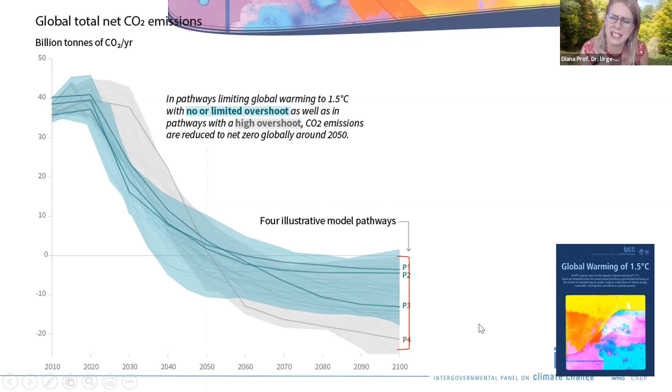The problem is there's a major concern in the scientific literature recently, because so many of these scenarios rely so heavily on BECCS. BECCS has issues with biodiversity and ecological concerns, but also with costs and many other issues. But if nothing else, just look at the intergenerational justice issue. Basically this means we continue to have fun while we delegate all these costs to our children, because BECCS has nothing else but costs - it's going to be very costly to capture carbon dioxide from the atmosphere and store it permanently, without offering much else.

As opposed to that, scientists were asking, okay, can we do something else, not relying so much on BECCS? Yes, there are alternatives, but not many scenarios out there meet the stringent climate conditions without this enormous amount of BECCS. What you see is the big difference between the two is basically a free fall in energy demand, not only emissions but energy demand. This means we cannot meet stringent climate goals without controversial technologies, unless with very strict and high attention to efficiency and energy demand decrease.

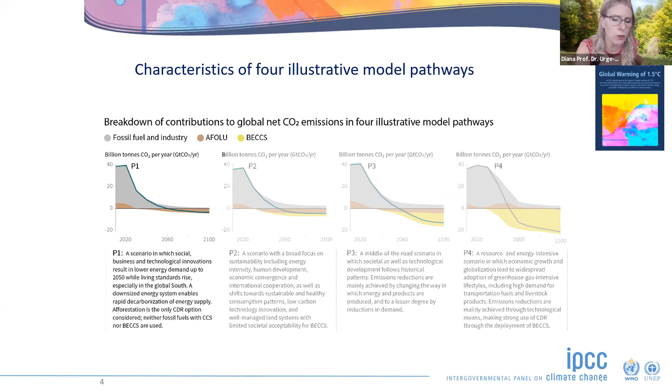This map—and you know that very well, so I don't want to take your time—shows there are many net zero buildings also in Europe. As you see, actually most are in Europe. But if you look around the scientific and professional literature, we could collect a very large number of buildings from around the world.

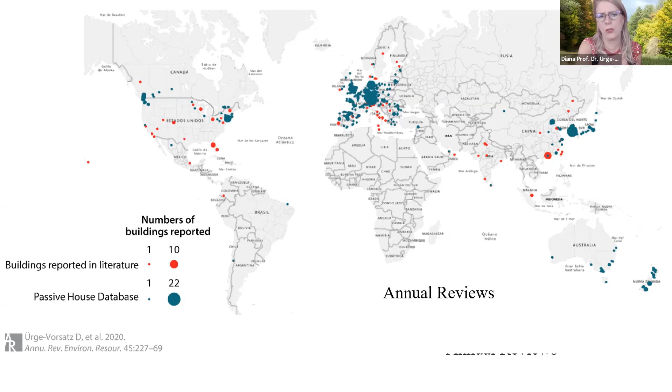But in all the rest of the world, although unfortunately there are not many examples yet in Africa, based on similar climates and experiences elsewhere, it's possible and feasible. But what we also concluded is that it's actually cost effective.

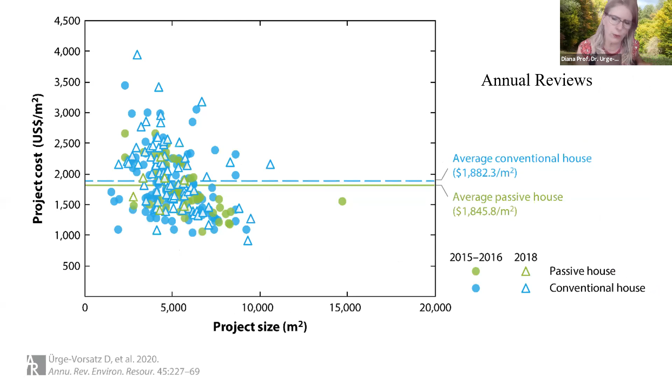Unfortunately, it's not very easy to find scientifically valid evidence for this, but for example, this is the figure we used in the paper. These are the costs for conventional houses in the same area—an area of Philadelphia—in the same time period, and the researchers found that the passive houses were in fact cheaper than the average conventional house.

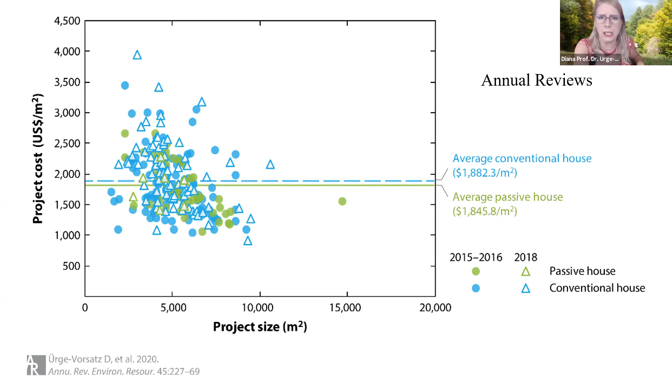Of course, there is a huge spread of costs all over the place, but the point is that on average you cannot distinguish. So for newly built buildings, you can definitely stay in the cost range of new conventional buildings, and where there were studies, we found the same.

In terms of retrofits, this is originally from our paper, but also from the IPCC report, the fifth assessment report. These are the retrofits—so the cost of conserved energy from retrofits, CCE per kilowatt hour saved—shown as a function of energy percentage saved compared to the baseline.

We also see that based on different types of climates and building types, there are very different costs. The point is that you can always make everything very expensive, especially in construction. If you do major retrofits, often you don't only retrofit energetically, but also upgrade the facade, make things nicer, put in new tiles and stuff like that.

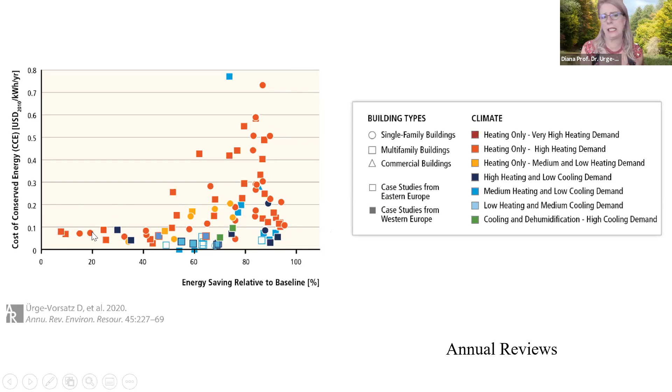So you can make it expensive, but the point is that the lower end of this curve is constant. You can have competitive cost of conserved energy for an 80–90% energy saving retrofit, as well as a 10% energy saving retrofit. And as I mentioned, this is kind of the power plant of the 21st century.

This is the building of the TU Vienna. And this building is also producing more energy than it's consuming.

I have to admit that here I made one of my biggest scientific mistakes, because originally I was trying to study which world regions and which building types you can do net zero energy buildings, and which you can't. This was also helped by Ksenia Petrichenko's dissertation, which she presented at eceee. We concluded that this building type is where it's impossible, in places where there's not a lot of solar energy—we are talking about high-rise and commercial buildings.

Now fortunately, if you look at the numbers, I wasn't that stupid to say that, because for this particular example, before renovation it consumed 800 kilowatt hours per square meter per year. A typical new office building in Vienna is about 450 kilowatt hours per year. However well you look, you cannot produce more than about 60 kilowatt hours of photovoltaic energy per square meter per year. So there is quite a big mismatch there. So perhaps I wasn't that stupid to say this is not possible.

But fortunately, there are more stupid people than I am who just go for the crazy, and this is what they have done. This is the typical new office building and its energy consumption—it's in German, but the details don't matter. Really, the point is that it's all the different types of electricity used in the building. And this is what they did.

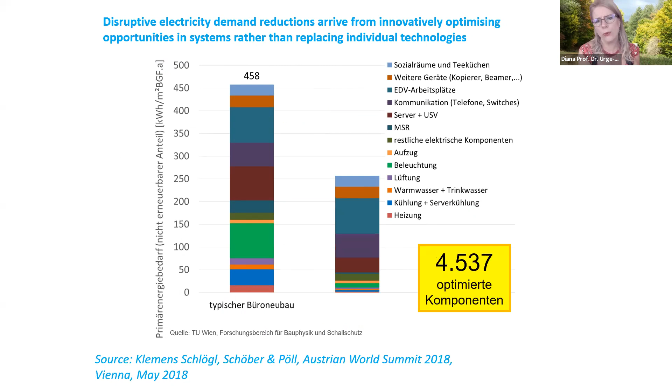What they did is they optimized 9,300 components, and as a result they reduced the building energy demand by nine-tenths—down to one-tenth of the original power demand. Most of our studies never really dare to say that you can reduce commercial building plug loads by 90%, but this didn't only study that, they implemented it. This is what happened.

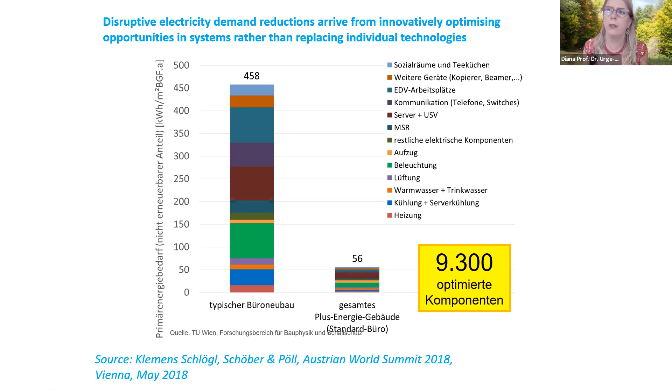We are doing the same now for CEU's new building complex in Vienna—trying to reduce the energy demand by that much, nine-tenths. But this means there is no silver bullet; you really have to have a very detailed understanding of the energy use of the people, the buildings, the components, the technologies, and only then are you able to achieve this major reduction.

So the key point in the paper that we illustrated with this example, but also provided other evidence for, is that the key to net zero energy buildings is actually energy efficiency—bringing down the energy demand of the building users. So not only heating and cooling, but all energy demand in the building. If you bring it down, then it is much more possible to do net zero energy buildings.

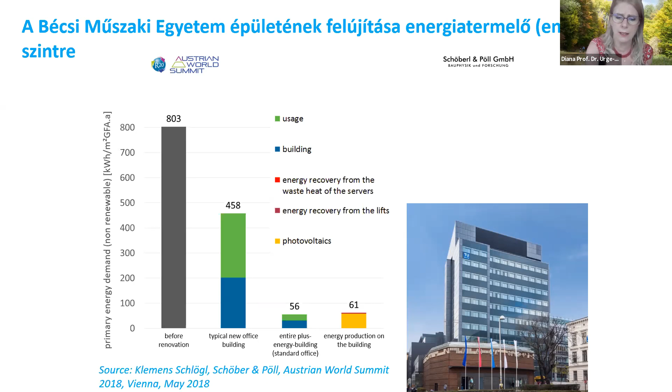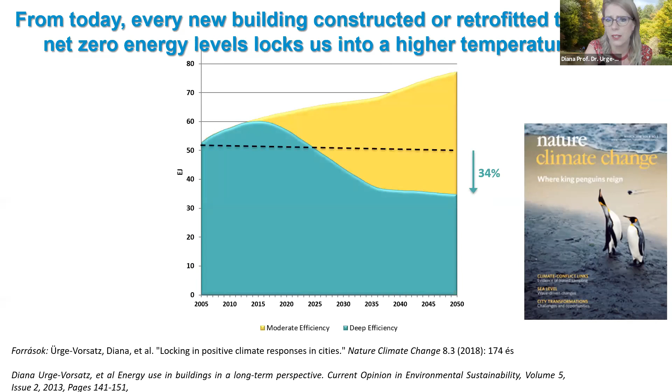As a final point, the problem is that we are not doing this. There is, for example, the renovation wave in Europe now—a lot of money under economic stimulus packages for different construction and infrastructure and building projects. But every single building we build from today, and every retrofit from today that goes to less than a net zero level, locks us into a higher temperature future. Why? This is a study we did and published in Nature Climate Change, among others—there are other references at the bottom of the slide.

Basically what we show is that if you compare a fairly ambitious building energy scenario globally—it doesn't increase as much as business as usual—to a more ambitious one, and this is not yet the most ambitious because this is our older research (we are updating these numbers now, and Souran presented our new numbers yesterday), even based on the much earlier technologies where we could not yet do such good net zero energy buildings, we are locking in 80% of 2005 total global building energy use by doing semi-good buildings. Because any time we reduce building energy consumption by just 20, 30, even 50%, you're locking in the remaining 30, 40, 50% that could be saved, because then it becomes too expensive to go back and fix it.

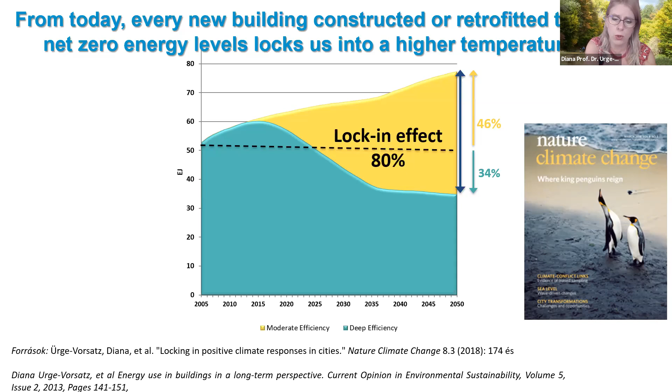But by 2040, 2050, we will need that reduction potential as well. Now we can still do it, we can still meet climate goals without them, because it's okay to reduce 30, 40%. But when we have to reduce 80, 90%, or 100%, we will need that potential, but it's going to be extremely expensive or impossible to go back for that. So really, it's crucial that from today, every new building we build, or every building we renovate, tends to be net zero. We have shown that this is all cost effective, and this is not rocket science, and it's available everywhere.

So let's not let a good crisis go to waste. Thank you for your attention.

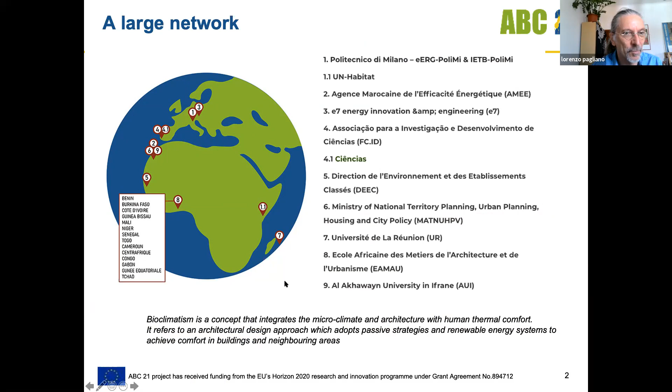So on energy, what we have found recently is that for high performance or zero energy buildings, recent research and standards tell us that the best way to qualify them is with 3 indicators, not just one. There is this net zero energy concept over a year, which has some problems. Diana already indicated a good way to solve these problems, but I will come back to that, and implications for policy, possibly, in our discussion.

So we try, throughout the project and this presentation, to use one language to be able to communicate effectively, and that's the language of the ISO 52000, where there is a common set of terms and definitions about energy performance of buildings, which can be seen also online, not only in the standard, not so easily accessible at this site. All the definitions are there in English and French. And we start with exactly what Diana was saying: reduce demand, and how can we define very well, physically, this demand.

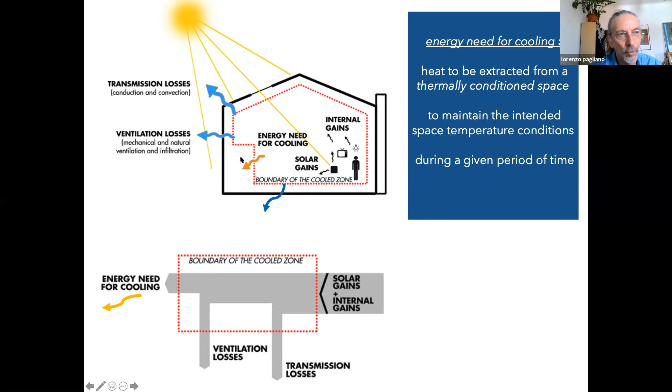The difference between these gains and losses is the remaining energy need for cooling - the energy that we have to extract actively, or with some passive device, but anyway with systems that will extract this energy to keep the temperature or conditions stable.

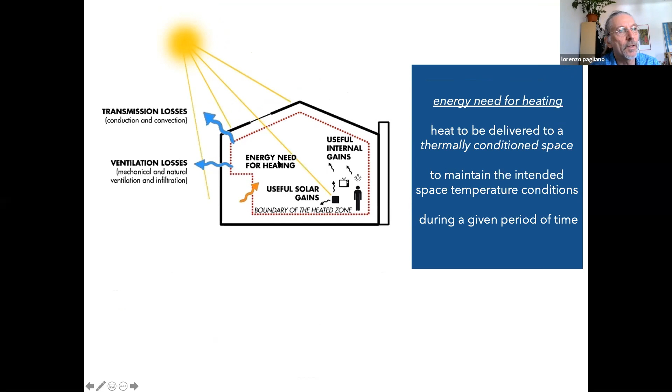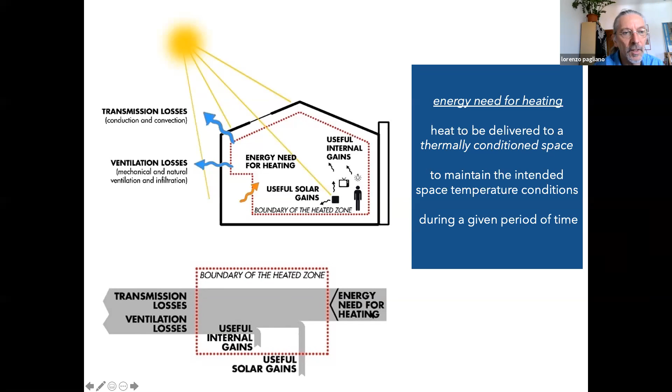And this red boundary here is the air within the room. Then we have the systems delivering this energy need, maybe a boiler, a storage, a radiator, a solar panel bringing energy there, gas bringing energy to the boiler.

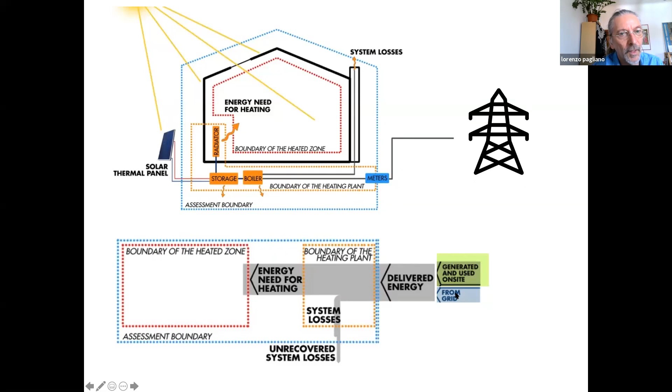So to obtain this energy need for heating, we use what is called delivered energy, which goes to the meter. It can be energy coming from renewable energy at the site or from the grid. The total entering the building, the systems of the building, is called delivered energy.

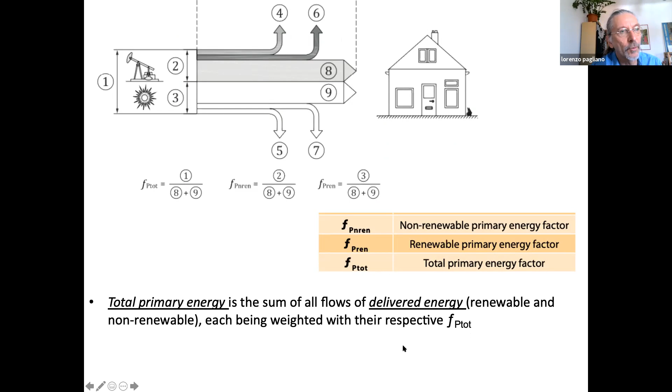And then we finally have primary energy, where we multiply the delivered energy - part fossil and part renewable - by factors that take into account the losses from the source to the boundary of the building. So we get total primary energy if we consider the sum of all delivered energy, renewable and non-renewable flows, and multiply each of them by their respective factor, which takes account of the losses.

If we then consider the non-renewable part of these flows, and multiply that taking into account the losses, then we have what is called non-renewable primary energy.

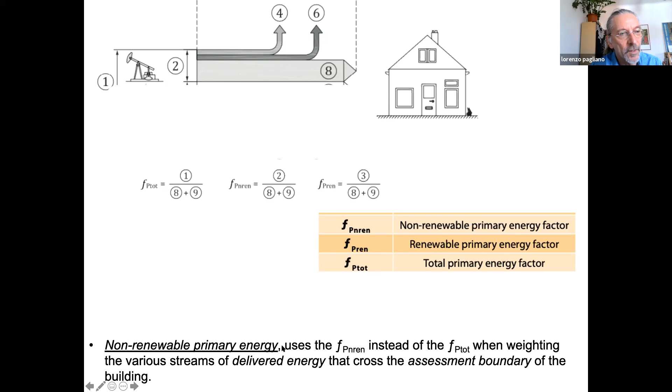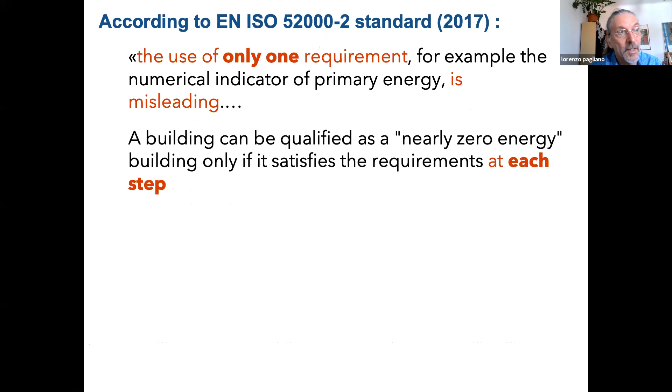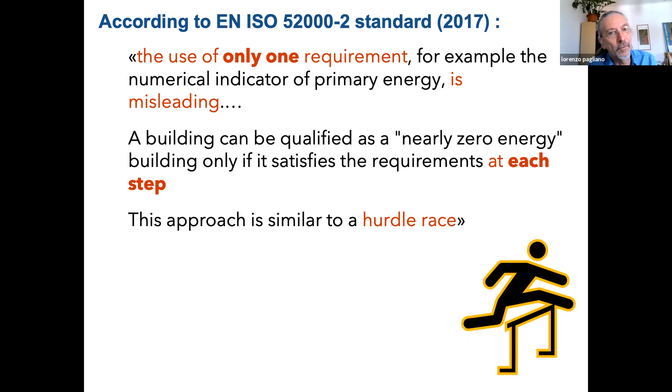So we have these indicators, and sometimes buildings are qualified using only one indicator, but that's a very incomplete way. The standard says using only one requirement is misleading, not only insufficient. We need to have three indicators and fulfill each of them. It's a sort of hurdle race where we have to overcome three obstacles.

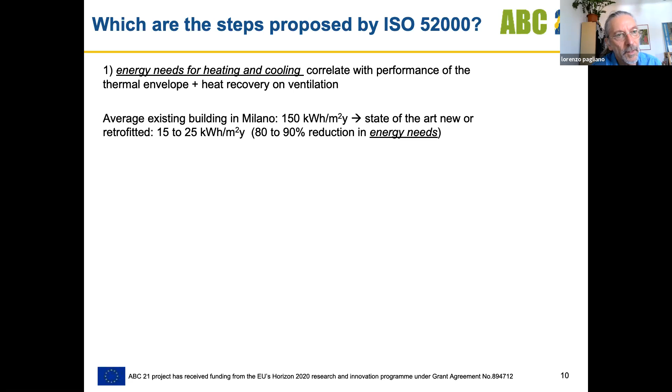These are the energy need for heating and cooling, which describes the thermal envelope and the heat recovery on ventilation. And as Diana was showing, this can be highly reduced - this demand for energy can be reduced by 80-90%, for example the use for heating and cooling in new buildings and in retrofitted buildings. That's the first hurdle we overcome.

And the biggest one, the one where we can make a difference: total primary energy describes how the active systems use fossil or renewables efficiently or inefficiently. This is a low total primary energy, a second step to achieve.

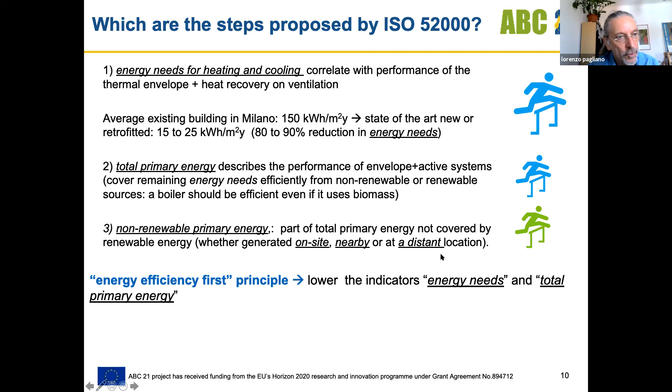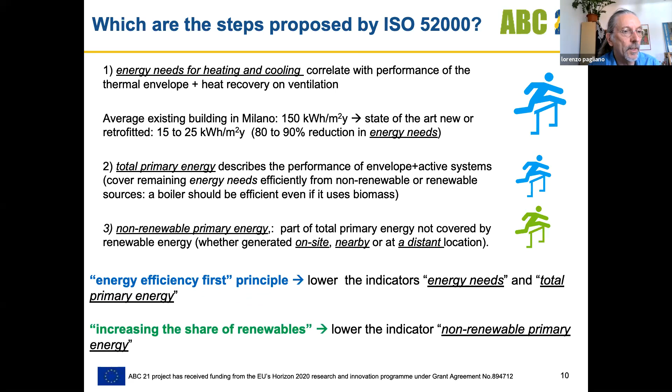And then a low non-renewable primary energy - so a low part of primary energy coming from fossils is the third thing to do. So we can say the energy efficiency first principle is telling us to make as low as possible the energy needs, first of all, and the total primary energy. And the objective of increasing the share of renewables is achieved if we can reduce the indicator non-renewable energy.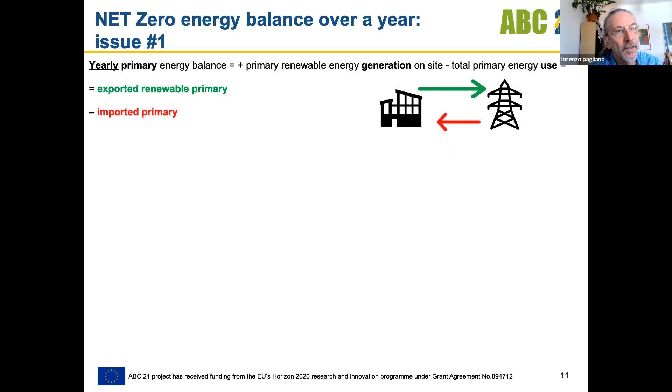Sometimes these objectives are expressed through this net zero energy balance over a year, which can be described as exported renewable primary minus imported primary to the building. So we could say, okay, over a year, we have as much imported from the grid as we export of renewables to the grid. These two things balance out, and we have a zero energy use.

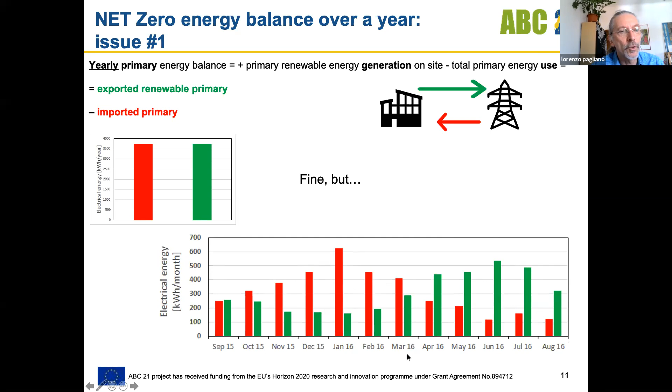And this, for example, is what we have over a year, which is a good goal. But if we then look hour by hour, or in this case month by month, we see that if energy is generated by photovoltaic in Milano, we generate a lot of this green energy in summer and much less in winter, where we need more - so we have more use in winter than production and vice versa - which means that we still burn gas and emit CO2 in winter.

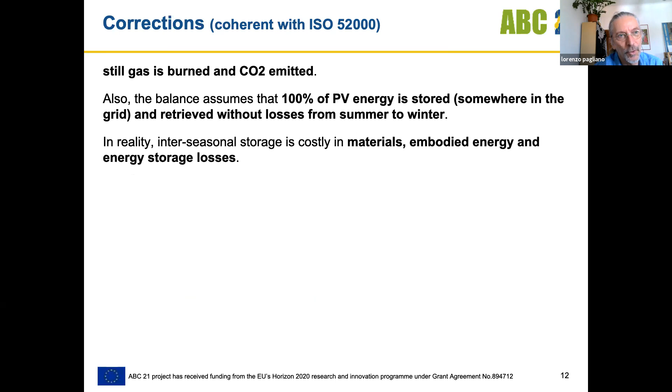And if we do this balance where we say, okay, but the total is zero, we are assuming that the photovoltaic which I export to the grid in summer will be available for me in winter for free, with no losses due to having been stored for 6 months. This is obviously physically not true. Interseasonal storage costs materials, embodied energy, and energy losses.

So we should try to reduce this problem by regulation. For example, the energy balance in Italy is calculated on a monthly basis, not on a yearly basis, so you can't offset your overconsumption of winter with the overproduction of summer. We could calculate the renewable primary energy factor, including the losses, while in the trivial way to do this balance, the losses are simply ignored. But obviously the right way to do it is the physical way.

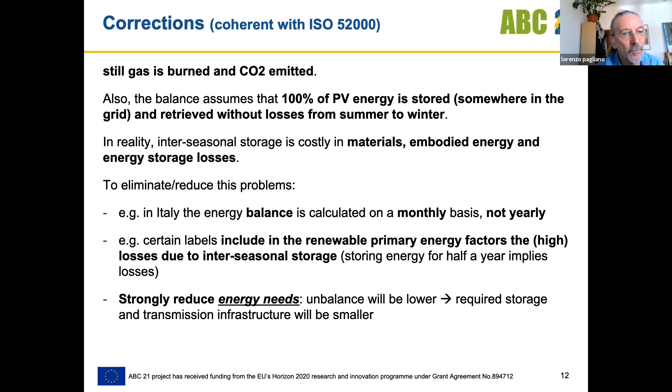If we reduce the energy needs, if we have a very low demand, also the imbalance between one hour and the next, and the imbalance between summer and winter, will be reduced by a factor of 10 - so reducing the requirements for storage and transmission infrastructure.

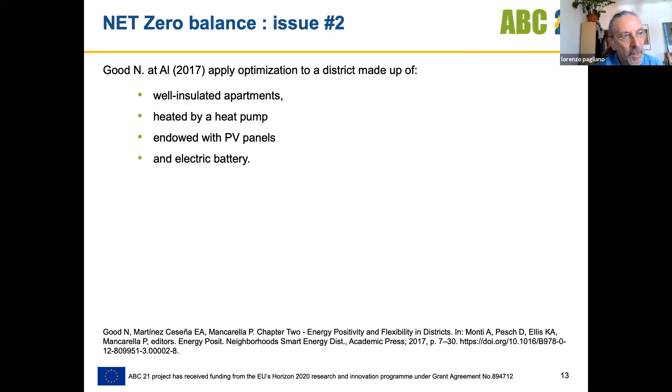There is another issue with this zero energy balance. Here it's a case of a village with well-insulated buildings, heat pumps, PV, and battery.

Optimizing it for net zero energy, the researchers find that, okay, the optimization doesn't use the battery at all, because using the battery means having losses of storage - you store, you recover, you don't recover 100%. So in terms of this balance, it's much better to sell to the grid, where the losses magically disappear in this accounting.

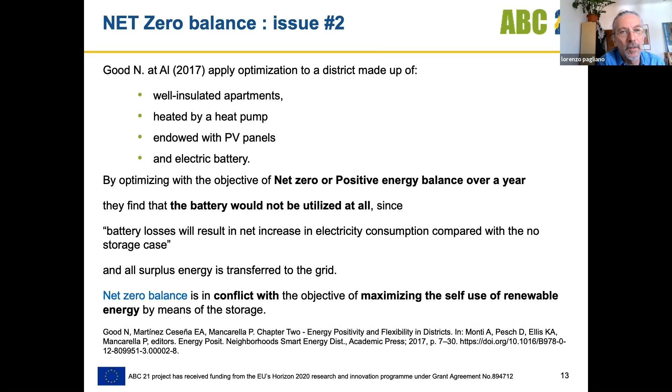So in this sense, net zero as an objective, a mathematical objective, is in conflict with maximizing the self-use of renewables using storage.

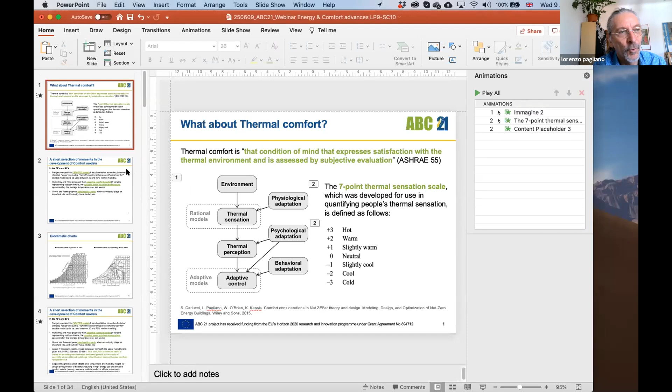So the second part of this chat was about comfort. What is thermal comfort? There is a general definition incorporated into standards for many years now, according to which thermal comfort is that condition of mind that expresses satisfaction with the thermal environment and is assessed by subjective evaluation. This is specifically the version of the ASHRAE 55. But what that means is, let's say, not a physically bounded definition. There are terms like satisfaction, like subjective evaluation - how can this really help the physical design of a net zero energy building?

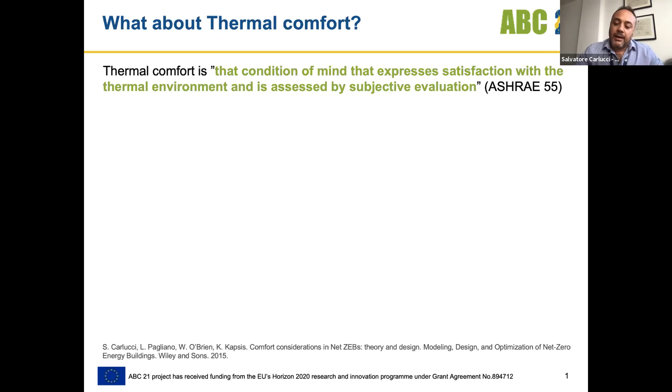There is a context in which the term thermal comfort fits. That is this kind of schematic where we consider the human body, each of us, exposed to some environmental condition, and what we perceive as a thermal sensation is basically the result of the reaction of our body. This is a physiological adaptation to the environmental condition. There are some models developed in the past 50 years that have tried to quantify this effect in order to predict and assess thermal conditions in buildings affecting the human body.

Then there is a second level, the thermal perception - how we perceive the thermal environment we are in. In this case, we have a second layer, a second lens to interpret the condition, due to our psychological reaction and adaptation to it. Then there is another level, which is actually the adaptive control that we exert in the building. It depends, of course, on the psychological adaptation we use, but also behavioral adaptation - what we are as social human beings - which might impact the way in which we interact with the building.

Thermal sensation, without going too much into the details, is quite interesting since it's something that is easy to understand and is directly used for some of the assessments we will see in a while. It is typically expressed on a 7-point thermal sensation scale. There are other ways to do it too, but basically it's a vote each of us can express to qualify the thermal environment we are in. It's represented using this discrete scale from +3 to -3, hot to cold. There are official translations in other languages, and the typical English reference goes from hot to cold, passing through warm, slightly warm, neutral, slightly cool, cool, and cold.

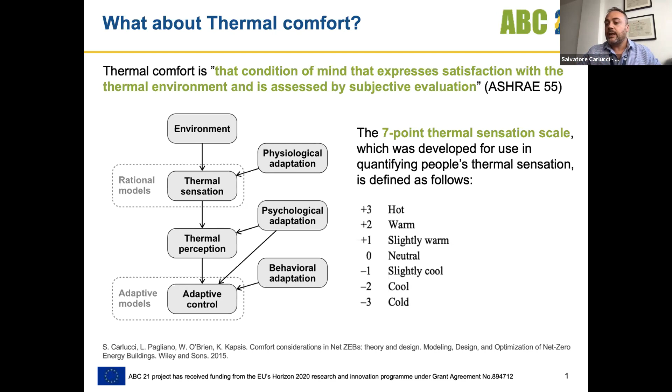This is the way we typically try to evaluate thermal sensation, and it's used by rational models - typically energy balance based models - that try to model the human body like a white box and account for each of the energy fluxes entering and leaving it.

Just a brief introduction about the evolution of thermal comfort. Everything started in the 60s, the models were framed in the 70s, and in the 80s there was a strengthening of the concept.

One of the most important and referenced models, particularly of this kind of rational, energy-balance-based approach, is the Fanger model, also called the PMV-PPD model, where PMV stands for Predicted Mean Vote and PPD for Predicted Percentage of Dissatisfied people. It's a model that takes 6 variables as input, but none of them is related to the outdoor climate - that was one of the first criticisms this model received. But this model was really accepted by the community and has been integrated into standards, and is still referred to until now.

It was very important to mention that Fanger in the 70s, in the book Thermal Comfort, mentioned that humidity has a low influence on thermal comfort. This is extremely important to keep in mind also for assessment that we will discuss later. When Fanger presented the model, he stated that it is reliable and can be used for considering some ranges for the input variables. Relative to relative humidity, these ranges go from 30 to 70, so outside this range, this model should not be applied.

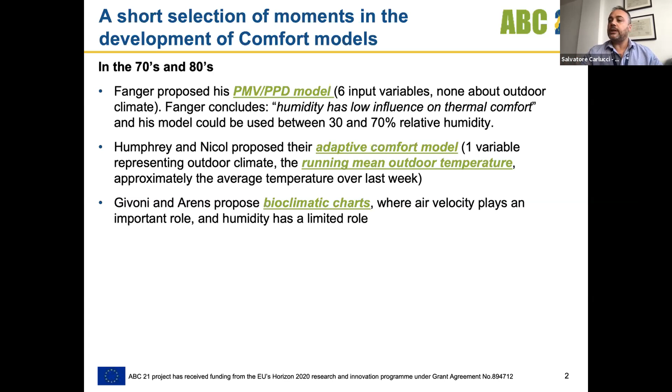There is a third approach that was very common in that period, in the 80s, proposed by Baruch Givoni and Ed Arens, that was also represented graphically through a bioclimatic chart, where it was very interesting to see that air velocity played a very important role, while humidity again was there but was not really changing the game.

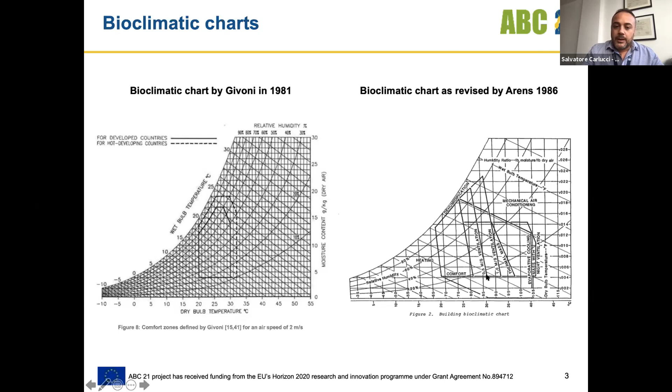It's also interesting to mention that Arens, in the 80s, mentioned that for natural cooling it was necessary to modify the upper humidity level given in the ASHRAE standard. This is in 1981, and this is a number that is quite common in our community: 12 grams of vapor per kilogram of dry air. The justification was that this value is based on avoiding condensation and mold growth in the ducts of centrally air-conditioned buildings, rather than on human thermal comfort requirements.

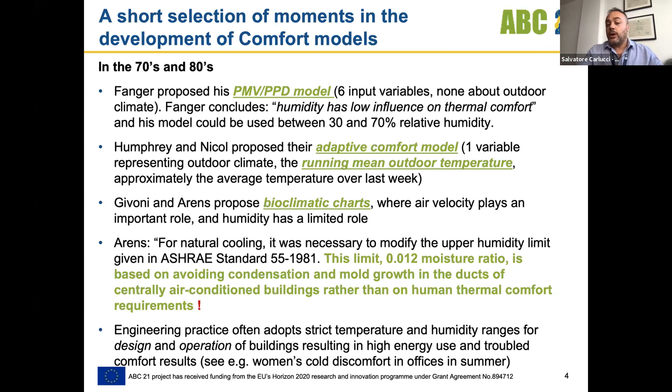So again, this kind of threshold was present in order to solve a very important technical issue, and was in some ways extrapolated and used as a sort of threshold for thermal comfort application. That is not the case. Then engineering practice in the last decades has in some ways incorporated, and this is very good, thermal comfort models, sometimes approximating or simplifying them in a way that actually is not really aligned and comparable with the original indications of the main researchers. So, for example, this is a picture from a standard.

What we can see here, without getting too much into the details, are the temperature ranges for the heating season and for the cooling season, where the typical conditions for energy calculations are presented with this range: for heating from 20 to 24, and for cooling from 23 to 26, giving the energy analyst the possibility to decide what kind of threshold to use.

So we could also get into the paradox of choosing 23 degrees as the set point for cooling, while the set point for heating might be 24. That is quite crazy, but actually Ed Arens, through an experimental campaign in California, demonstrated that on average these are the kind of figures that are identified. Why? Sometimes we, as practitioners, mess up between design, control, and assessment. These are completely different aspects that require different hypotheses and sometimes different assumptions. This is extremely important to keep in mind.

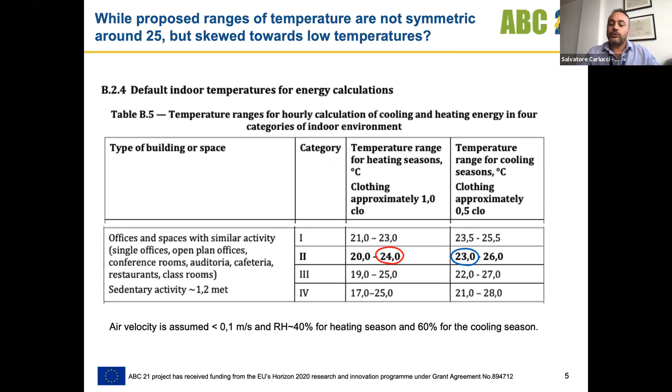Going closer to our time, we are at the 21st century. Fanger in 2002 acknowledged that his model might suffer low predictive skills in real buildings, basically due to the fact that this model was developed in climate chambers, in laboratory studies, in particular in warm climates.

He proposed corrective factors that could even expand the comfort range by a factor of 2. So you see how big the uncertainty applied here becomes.

Meanwhile, in recent years, thanks to efforts like the European SCATs project and the ASHRAE RP-884, which led to the creation of the first ASHRAE Global Thermal Comfort Database, adaptive models were introduced. They were first integrated into ASHRAE 55 in 2004, and then the European standard incorporated one in 2007. Recently, thanks to the contribution of the whole thermal comfort community and annexes like Annex 69, a new ASHRAE Global Thermal Comfort Database has been released, incorporating even more data than before, representing the largest data source available on thermal comfort in the world, covering different types of buildings, thermal zones, and conditions.

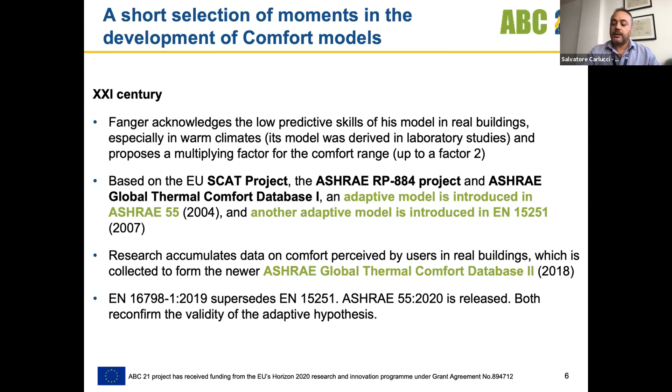What's interesting is that standards also evolved over time. The EN 15251, which first incorporated the European adaptive comfort model, has been superseded by EN 16798 Part 1, 2019. The ASHRAE 55 is also in an ongoing revision process, but both standards confirmed the validity of the adaptive hypothesis—it's still there and actually getting strengthened.

Just to give an overview: the first time thermal comfort got integrated as a concept into technical standards was in 1966 with ASHRAE 55, and the latest revision of this set of standards is from 2020. So that's about 50 years we've been discussing thermal comfort. Here in red you can see the evolution of ASHRAE 55. There was a first revision in '74, I mentioned this earlier, then '81, then '92. Since 2004, the adaptive comfort model has been integrated, and since then it's been in a continuous revision process—every 3 to 5 years this standard is updated with the latest advancements and evidence from research.

Here we also see the ISO standard, which right now incorporates just the Fanger comfort model. Its latest version is from 2005, revised but confirmed in 2015. Then there are the European efforts with EN 15251 from 2007, revised in 2019, where we have both the Fanger comfort model and the European adaptive model. So there's a lot of activity in this sense.

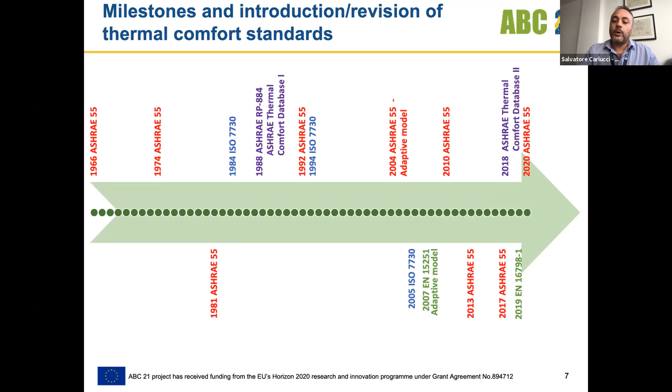Now, to summarize a few key points helpful for this discussion, we'll refer to the latest version, ASHRAE 55-2020, which has some very important elements of novelty in its latest revision.

Picking a few elements—there are even more novelties, but basically the first element is that the applicability of the adaptive comfort model has been extended also to buildings that have mechanical cooling systems installed, as long as they are not in operation. Before, the adaptive comfort model was limited just to naturally ventilated buildings, as they were called.

Also, what's interesting—the second point—is that operating set points for buildings are not mandated. There's no table that says 'this is the reference value' in this standard. So we're moving towards a point where, instead of specifying specific conditions, we can specify scenarios that the designer can meet, giving flexibility to adapt to site-specific or occupant-specific conditions.

An extremely important new element, the third point, is that air velocity has been formally integrated—both modifying the analytical model with the introduction of the elevated airspeed comfort zone method, based on PMV plus the standard effective temperature, applied when airspeed is higher than 0.2 meters per second, and also in some ways integrated into the adaptive comfort model. We'll see that shortly.

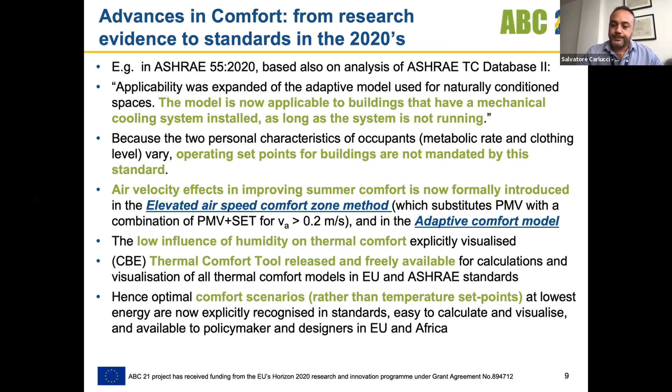So we no longer have the 21, 24 degree C scenario with fixed condition set points, but comfort scenarios instead—we set the conditions. This is just the analytical comfort zone method based on PMV/PPD, the Fanger comfort model, represented in normative appendix B.

We have compliance with the model if the PMV (predicted mean vote) falls within this range between minus and plus 0.5. This thermal comfort tool can model all of these models. What we have to keep in mind when applying this model is that the metabolic rate of occupants has to be between 1 and 2 MET, and the average airspeed has to be lower than 0.2.

This model will ask for some additional verification based on local thermal discomforts. What we see is that we have no upper and lower limits on relative humidity. This is a difference with respect even to the bioclimatic charts of Givoni and Arens that were 95% and 0.04. We also no longer have this reference to the 12 grams of water per kilo of dry air, so actually we move up to saturation.

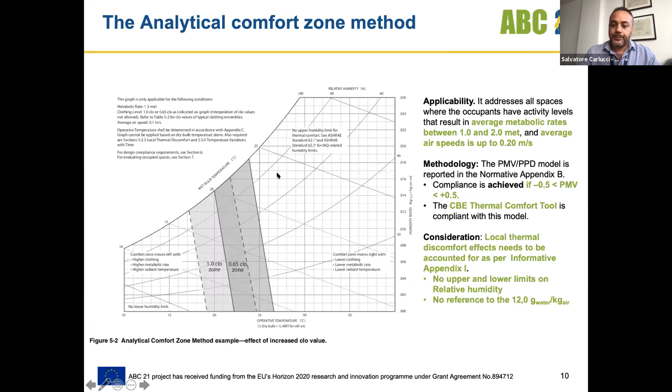The elevated air speed comfort zone method is an analytical tool based on coupling the PMV plus the SET, providing additional information on the thermal comfort zone for airspeed higher than 0.2. What's really interesting is that we could be in comfort for SET values that might reach temperatures in the range of 30-31 degrees with airspeed in the order of 1.2 meters per second. This is extremely important; it changes the way we deal with comfort in this case.

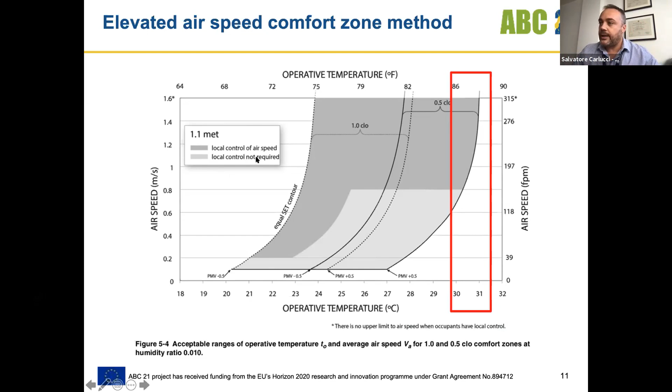We should also consider whether we have the capacity of controlling the airspeed. In order to achieve this condition, we need to provide users the possibility to directly control it. I'd like to challenge you to look at this and compare it with the previous table - it's very much different, the kind of condition that we can represent.

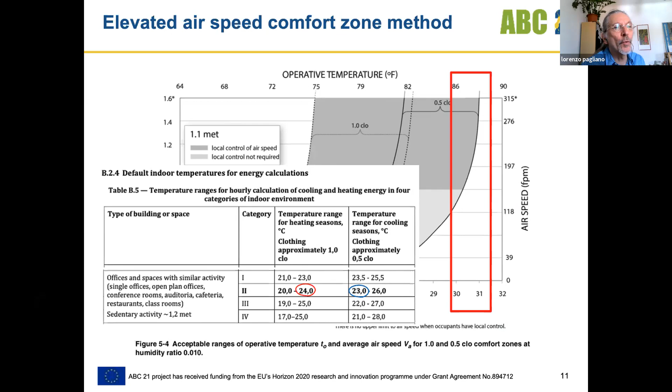Salvatore is telling me that we are till 4:15, so we need to leave some space for discussion. But okay, I'll go to conclusion. Thank you very much, very clear. In a few minutes.

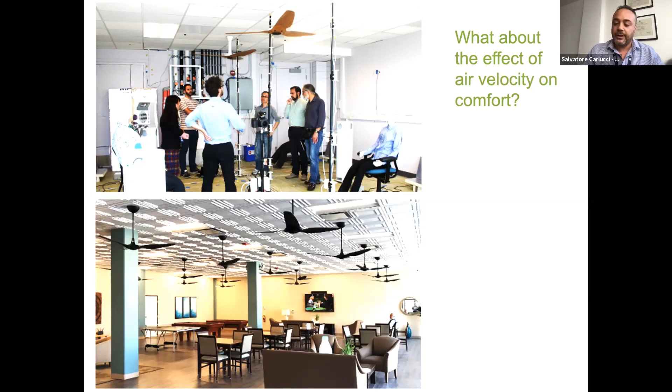What that means is that installing, for example, these kinds of ceiling fans can be very effective in increasing airspeed. There are tools, again, that can help us in designing these solutions.

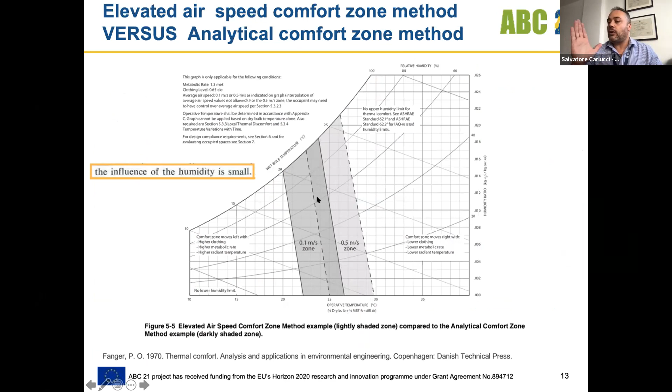The elevated airspeed - you see here what is the impact from moving from 0.1 meter per second to 0.5. That is not extreme airspeed. We have an increase, a shift of the comfort range by at least 3 degrees. Again, the influence of humidity is quite small - it's just the slope of this line that is presented here.

The adaptive model: here the input is the prevailing mean outdoor air temperature, then we get the optimal condition. What is really important is that now we could consider, under the scope of this standard, also buildings that have mechanical cooling and heating systems but they are not in operation under this specific model. But people have to be free to adapt their clothing, so no dress clothes or things like that.

Another important change is in the reference comfort conditions, which is now the 80% acceptability class, while the 90% that we bring from the past is now just for information purposes, and in case a higher standard of thermal comfort is desired, even if in the literature this is not always the case.

Other important elements - local thermal discomfort, clothing insulation, metabolic rate, and humidity and airspeed - are in this case already included into the model. But the novelty is that for operative temperatures higher than 25 degrees, we can add a correction factor. We can expand the upper acceptability temperature by some degrees according to the velocity: 0.6 expands by 1.2, up to 2.2 degrees for 1.2 meter per second airspeed.

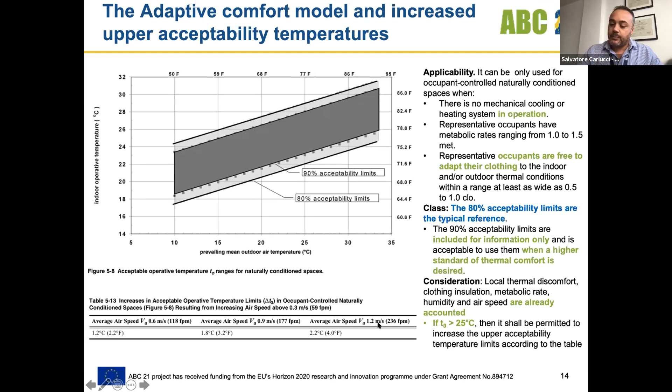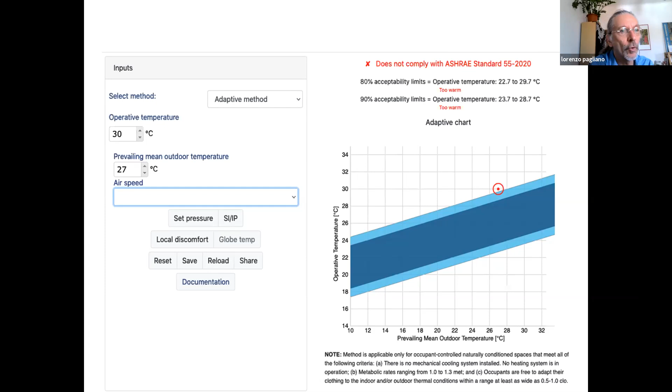I'm thinking of skipping these examples - these are examples of use of the tool. It's really a very good tool that the university group has generated. His colleagues, with whom we have been working on the database, etc., are doing very good work on this. Maybe go on, Salvatore, to the next one.

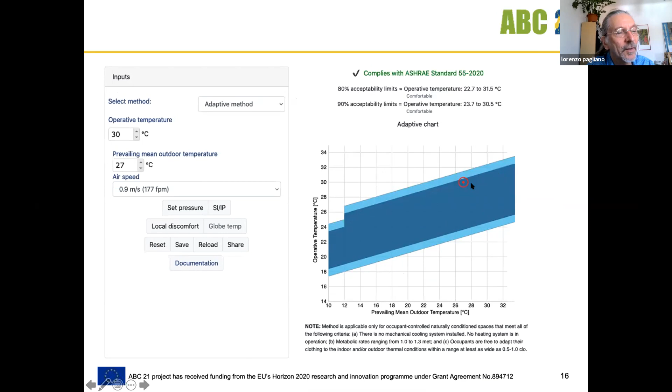So we see, for example, the velocity correction applied to the adaptive model, which brings into comfort what was previously out of comfort, this 27-point-something degree Celsius condition. Go on.

And increasing air velocity, the comfort zone expands towards the higher temperatures. You see directly how the comfort zone changes by changing air velocity, and your condition fits into the comfort zone.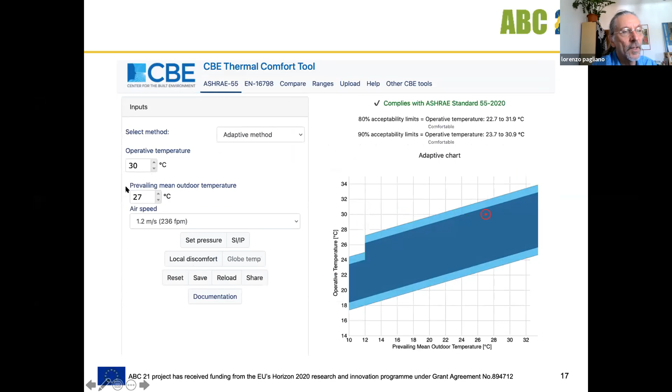There is a lot to do, and today's introduction shows how these concepts, this clear language that the standards offer, this clear description of comfort, can possibly be used in our search for good solutions with colleagues from many countries, from Africa, from Europe, within the project, but also how to intervene so that this clarity we now have available can be incorporated into the policy documents under preparation in Europe and in Africa.

That's Adrian. Would you like to say something about this, or others? Yeah, thank you, Lorenzo. I know you invited me to make some comments here. Delighted to take the floor.